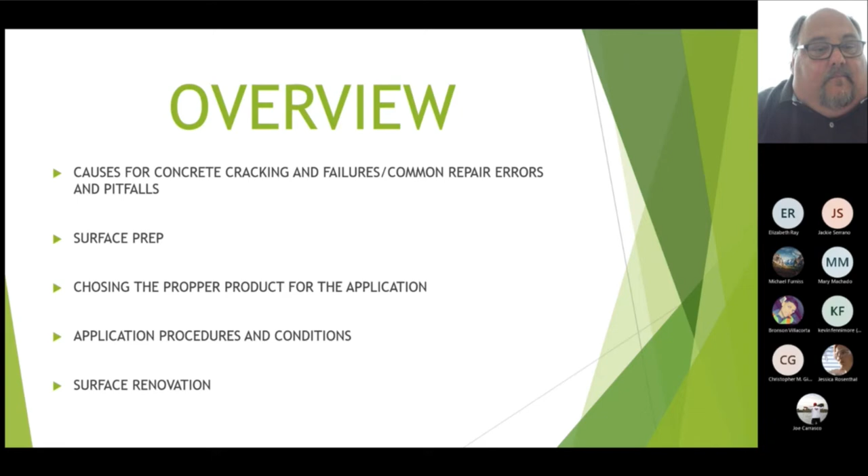And then towards the end, do a little surface renovation, because that's one of the things that we were asked about the most, was not just the crack repair, but how do I make it look decent? And especially with the way the market for housing is, it's important to make sure you've got a nice curb appeal and get most value for what you have.

So the topics we're going to talk about, like I said, surface condition and preparation. It's one of the top things that lead to a failure, not necessarily because of user error, just lack of knowledge on what you need to do and what needs to happen. And some of this stuff we think is like an infomercial for ShamWow or something, where you can just put it down over anything and it works and stops leaks and blah, blah, blah.

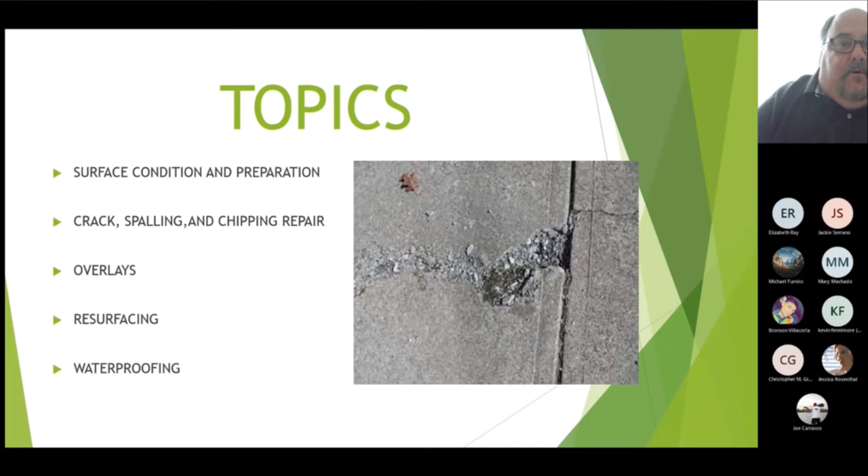We're also going to talk about cracks, spalling and chipping and repairing those, and surface prep for those, as well as overlays, resurfacing, and then towards the end, a little thing on waterproofing. So that way you have an idea of the scope from beginning to end to help you with your projects on what you need to do.

So one of the important things we will discuss is the causes for these cracks and failures. I put up a few pictures; I think we've all seen this in our travels. We might see it in our front yard and our driveway. One of the bigger causes for those cracks and failures is substrate issues. If you don't have a solid foundation, you don't have what it takes for the concrete to survive and allow for the natural occurrences that happen here, not just earthquakes in California, but settlement and movement of soil, droughts like we're in right now.

But like I said, sometimes you have a crack, water rushes down there and washes it out. No drainage underneath the slab, no drainage around the slab. Maybe not putting rock down before you put down your slab. Rebar, soft soil, even things like tree roots.

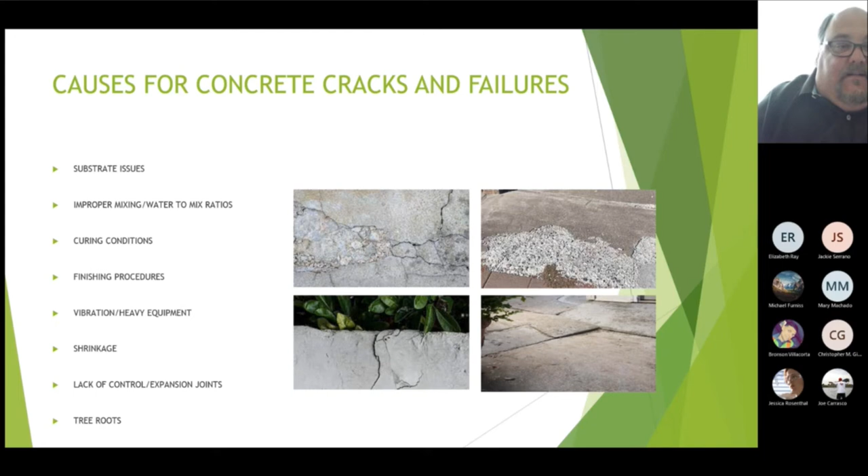The surface condition also is important too, just like we saw on the past slide. I'll go back to that. If you're looking at the top left corner, see all those little debris chunks that are getting ready to fall out? It's best to just take them out. You're patching the material anyways. That's going to cause an air bubble underneath it. It's going to cause a gap. And when weight's applied to it, it's just going to fracture through to the new patch that you put on top of it. So remove all the loose debris, everything that's not firmly attached to the slab. That's going to help you ensure that you have a good bond as well.

So that's really important, especially if you have an old slab that's really porous. Even though it doesn't look like it absorbs a lot of water, when you put the hose on it and the water disappears, it's going somewhere. You'd want to use that on patches that are either extremely porous or that are over 1 inch in depth. And the acrylic fortifier is an admix that you add to the concrete mix or to the patching product. That's like steroids for it. It amplifies the adhesion, water resistance, helps with the cure, and that's for 1 inch or less.

But you do not want to use these two together. One's a latex, one's an acrylic. When you do use them together, it will crack. So it's really important to follow the product specifications on whether or not you need it, because a lot of the new products, you don't need it. And we'll go over that once I get into the other products I'm going to talk about. We'll be able to see what products to use these on and what products not to.

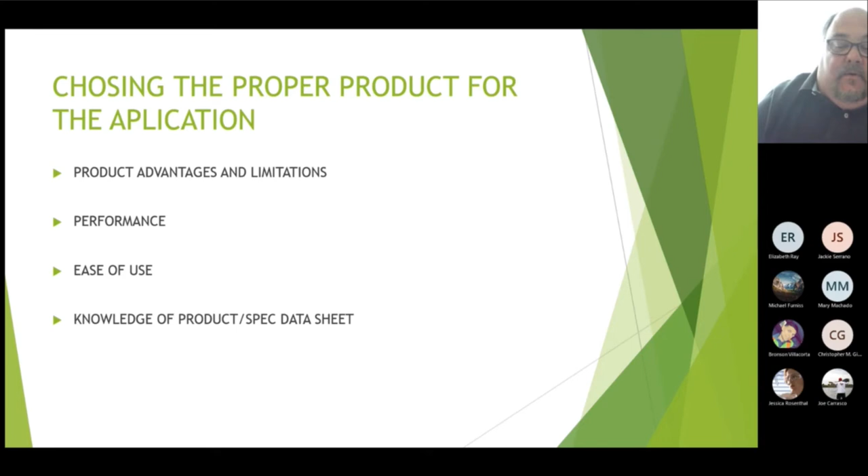Almost everything you need to know we can find on YouTube, I guess, but these product data sheets are specifically designed for Quikrete products by Quikrete people and approved by the spec data system. So they're going to give you all the information you need to make sure everything goes smooth, no hiccups, no need to call Dave when something happens.

So one of the first products we're going to talk about, it's one of the most popular products we've had in the 26 years I've been here. It's called vinyl concrete patcher. They call it vinyl concrete patcher because it has a resin in it that's similar to a vinyl. And what that does is create a great adhesion. The adhesion means this product can go down to a feather edge and usually up to about a 1/2 inch in one lift, and it doesn't lift at a feather edge. But once again, talking about product limitations and things you want to watch out for, this is not an overlay product.

You want to stick within about a 10 square foot area when using this product. You don't want to surface a whole slab with it. This is usually like if you got a tree root growing up and a little separation, you kind of need to make a little ramp out of it, or you have a pop out or a spall or a chip in the concrete.

This works perfectly because it mixes up just like peanut butter, a plastic consistency. Your surface prep for it is very simple. Just make sure there's no loose debris, make sure it's clean of dirt, paint, grease, oil, saps, things like that. Make sure it's damp, but no standing water when you apply this. Mix the material up, smooth it in, smooth it off, and walk away.

The product itself is like 5,000 PSI, but the bond strength's incredible. So being able to go down to a feather edge, you can make those little ramps and transitions, or repair thin chips and pop outs. So you won't have to worry about it chipping up and popping up as things are rolling over, even things like pallet jacks.

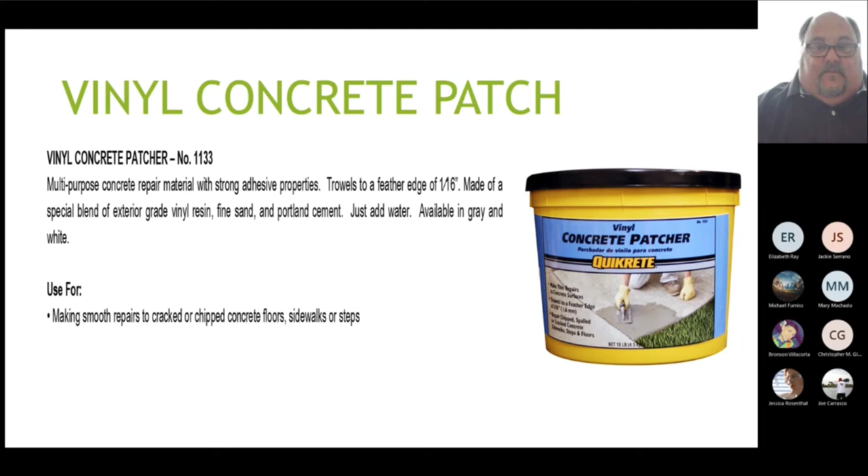So the next product we have, talking about limitations, this one has a much better ability to do more things than even the vinyl concrete patch. It's called Fast Set Repair Mortar, and it's our commercial grade line. It's a fast setting repair product that can go vertical and overhead. It usually sets in about 20 to 30 minutes. You can go 2 inches thick with this product. You can extend it with aggregate if you need to.

If you're going to repair something that's over 2 inches, definitely make sure it's rebar reinforced. If you come across a big busted out piece of a parking garage structure and there's rusted rebar, you need to make sure you clean the rust off that rebar because that will cause a crack. Forgot to mention that in the causes of the cracks too. That's another thing, corrosive rebar. When that rust happens, it creates a process that does actually cause cracks.

The nice thing about this one is, just like the vinyl concrete patch, you do not need any other bonding agent with it. No fortifier, no bonding adhesive. These have that in the mix. So that's one less step, one less thing for you to mix. The same applies with this as far as surface prep. You just make sure it's clean, damp, free of loose debris. With this one, mix up no more than you can use in about 15 minutes. Otherwise, you'd be tossing around a bunch of boulders in a bucket.

Just put the product in the space and screed it off. It doesn't matter if it's overhead or vertical like a curb, because it doesn't slump. It doesn't want to sag down. You can actually sculpt the edges of it. You're looking at like 6,000 PSI, but it's the bond strength and the actual strength of the material staying in place. If you have one material on your truck that's going to get you through a day, this is pretty much the one. I've gone feather edge with it, but it was underneath the carpeting, so I honestly can't tell you how it turned out.

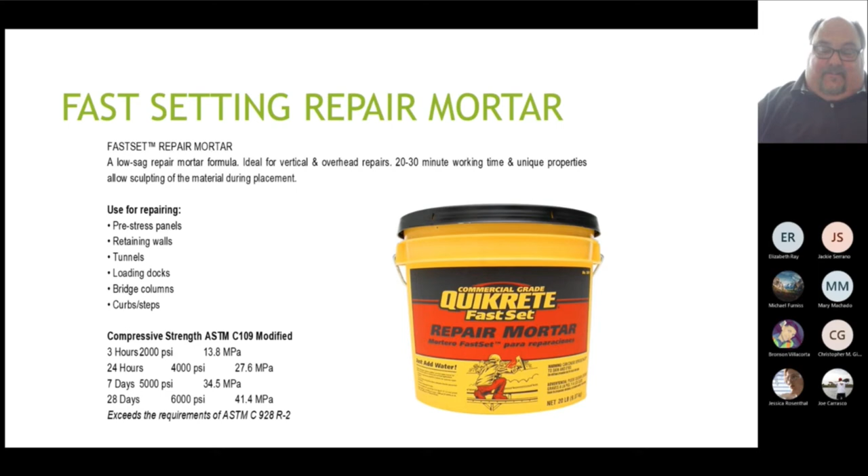We're rolling. All right, so one of the easy ways to do... Sorry. No, absolutely. I think Junior has a question. Go ahead, Junior. Oh, I didn't see it in the corner.

I apologize. Hey, Dave, can you add color to that? Yeah, you actually can. The color is going to be kind of tricky because of all the polymers that's in it for adhesion and for bonding and the different things they do in there for the products to be fast setting. The colors may turn out a little bit darker, that I've seen. And unfortunately, it's not available in a white base.

So just keep that in mind if you're using like a Davis color and you just want to splash a little black in there to do like a charcoal-y kind of color. Go light and do a test first, because usually it turns out a little bit darker. And it probably won't match exactly. That's the hardest thing, is trying to get anything to match existing concrete.

So many things affect the color of the concrete: the cure, the water content, the cement ratio, the iron in the cement, any additives, any admixes, how much it's worked, if it's sunny, if it's windy. So you can add color though to it. Sorry to drag that out. Thank you. You got it, bud.

So we're talking about ease of use. This is about as easy as it gets. When you got the cracks in your concrete, the polyurethane based crack sealant is incredible. Polyurethane base because the poly really bonds and sticks and is very, very flexible. So you won't have to worry about it busting out if you really have an active slab.

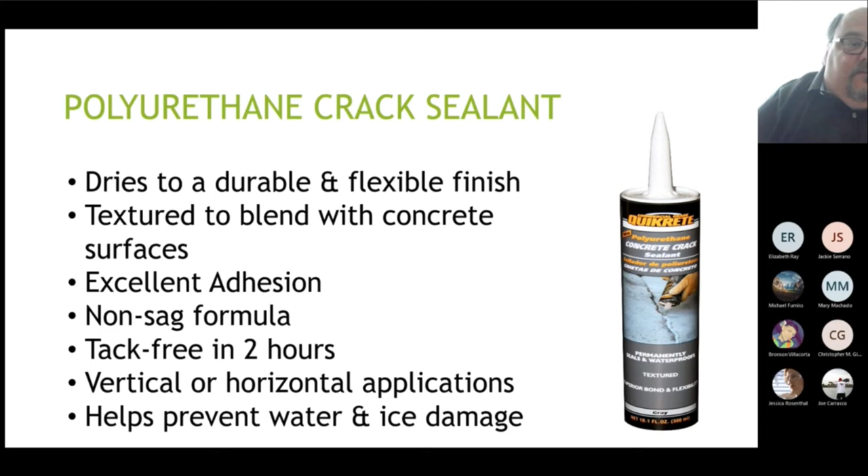Alrighty. So talking about the overlays, there's a lot of different products out there, and we make them as well, that are for overlays. And sometimes just the most simple things get the best results. This product's called sand topping mix. It's made as an overlay. It's just a sand and cement, but it's 5,000 psi on its own. You have to hand finish this just like you would any slab.

It's not a self-leveling, but the nice thing about it is it probably costs a quarter of what a normal bag of self-level costs, or some type of expensive overlay, and you're getting the same results. You go 2 inches down to about a 1/4 inch with this stuff. You can build it up thick if you need to do a thick setting bed for tile.

And then this is a product that you're going to want to use bonding adhesive or fortifier with. You're going to want to use fortifier if it's 1 inch or less, and bonding adhesive if it's 1 inch or more. Remember, the fortifier is the admix, bonding adhesive is the primer. But it's just so simple and it works fantastic.

We've had a couple jobs with this that we've done with some of the outside salespeople, and it's just so simple. It works so good. And it's one that's overlooked because everybody's looking for the super product. This one is just simple and it's fantastic and it works great. And they're going to save a lot of money.

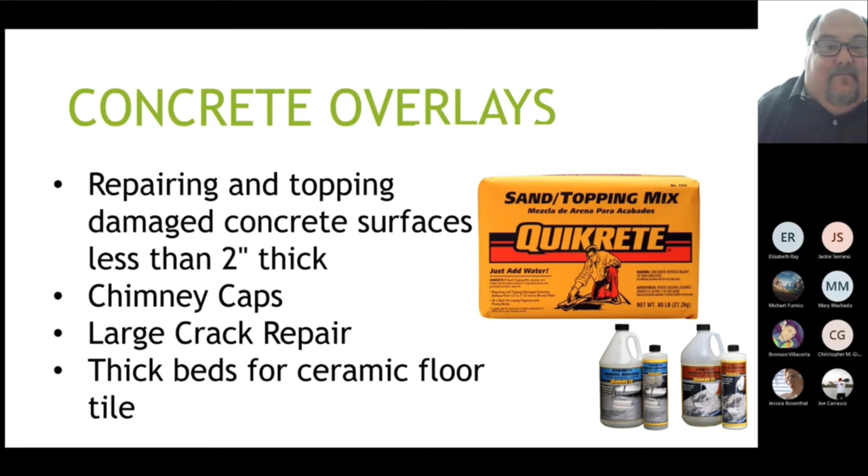So sometimes it's easier just to keep it simple. Success, simple, it's what we need to refocus on. The next product, as far as resurfacing and renovating concrete, is called Recap. What I heard most over years and years of doing this was, I patched, I used vinyl concrete patch, or I used the fast set repair mortar, and I fixed the cracks, and yeah, they're holding up great, looks good, but now my driveway looks like a spider web. Is there a way I can match or blend it in?

This product called Recap is kind of the same product as our concrete resurfacer that we used to sell in the black and blue bags a while ago. This product answers that question and then some. It's like taking your car to the body shop. They do all the Bondo work, sand it all out, and you can still see it until you paint it. Then it's invisible. That's what this is. You're talking about taking a driveway and a walkway of a house and coating it with the Recap. It looks like brand new concrete, and there's your curb appeal.

Plus, it looks nice when you come home. It looks like brand new concrete. The product, it's really easy to use, believe it or not. The prep is going to be at least like a 3,000 psi pressure washer. Make sure all the grease, all the dirt, all the paint, everything's out of there before you start using this product. If you do have to etch, make sure it's neutralized.

Now, the key with this product is you're going to have to do all your crack repair beforehand, because this will not fill. Well, it'll fill it, but you'll probably dump about 3 bags of this stuff down in the crack. You want to make sure your cracks are repaired. If there's any serious spalling, you can actually mix this stuff up and use it as a patching repair product. Mix it up into a plastic consistency.

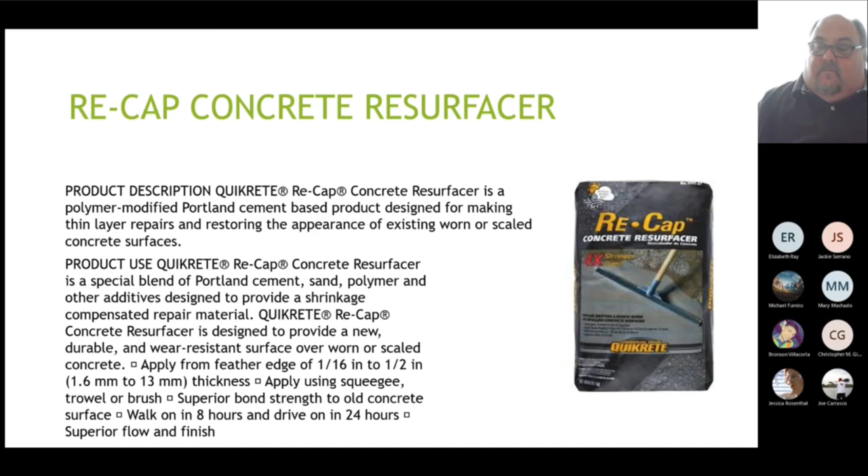So any questions on that so far? Cool. We're just blazing through this. I hope it's not too boring for you guys.

The state of California says you can't go over 4 foot high, but if you want to just dry stack your block and go over it with surface bonding cement and give it a finish, it's fantastic. And not only that, it's waterproof. So with this one, you're going to definitely want to use an acrylic fortifier and mix it in the mix with it. Make sure the block or the concrete wall is damp and clean, and go to work.

And if you have subgrade block or subgrade slab or a foundation, you can coat it with this, and it'll stop that moisture from getting into the basements and things like that. Plus, it just beautifies the yard. You can do a nice little Santa Barbara type finish on it. You can color it. It comes in gray and a white, so you can color it with the fibers in it. It's really strong. People have asked me, can you stipple it and finish it like a stucco?

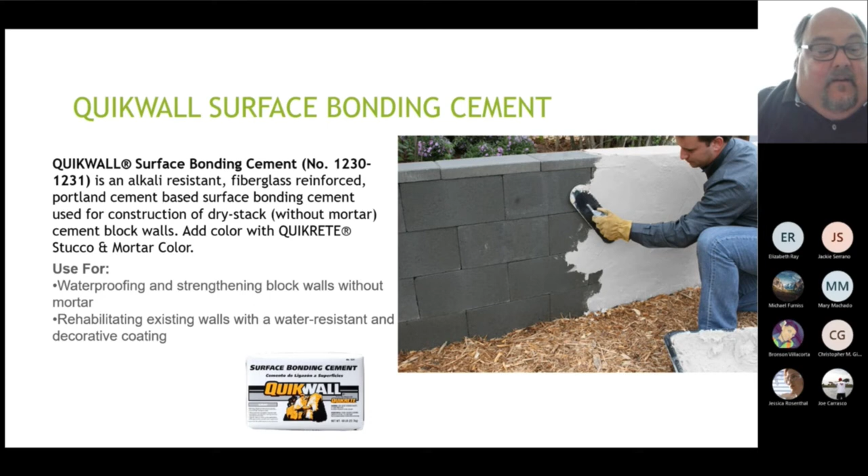Not really, because it is fibered. So you're not gonna be able to take a wet sponge and pull out the sand like you would in a finish coat of stucco. But it's fantastic, and it works really well with that. Anybody that needs to waterproof something or actually just beautify a wall, it's a really fantastic product that I think is underused in the industry. And like I said, you can go on the website and you can pull the spec data sheet right off of our website and read up a little bit more on it if you'd like.

There's also another one that's a waterproofer. It's called a heavy duty masonry coating, and some of the yards are carrying this as well. It mixes up like a cream of wheat type consistency, and it's actually applied directly to a pond to waterproof the pond. It's safe for the fish, to waterproof a basement wall to stop leakage and seepage and moisture from getting through the block. You want to definitely use acrylic fortifier with this in the mix. You mix it up and actually take a mason's brush and apply it, and it waterproofs your wall.

And it has like a natural kind of almost like a broomed finish. Obviously, you're using a mason's brush, but it has like a broomed finish to it, so it's a little rougher than like the surface bonding cement. So if you're looking for a smoother finish, go with the surface bonding cement. But if you really want a great product to waterproof, the heavy duty masonry coating is fantastic. You can use it on the ponds and it won't kill off your koi. So it's a really fantastic product to use for that.

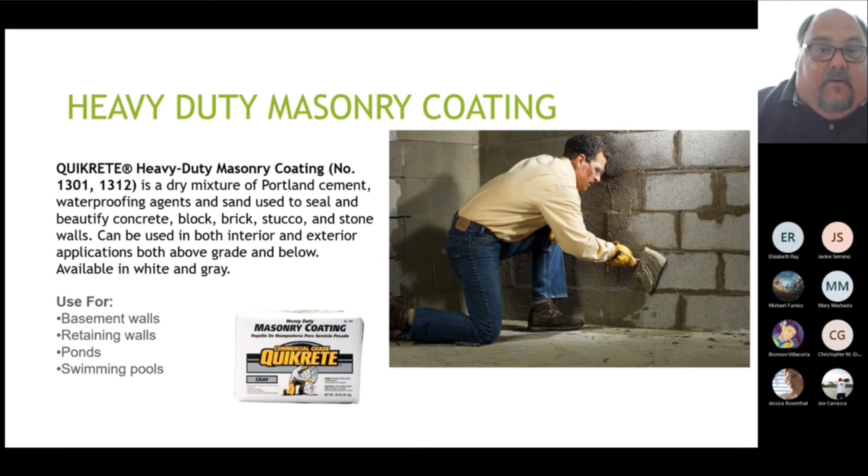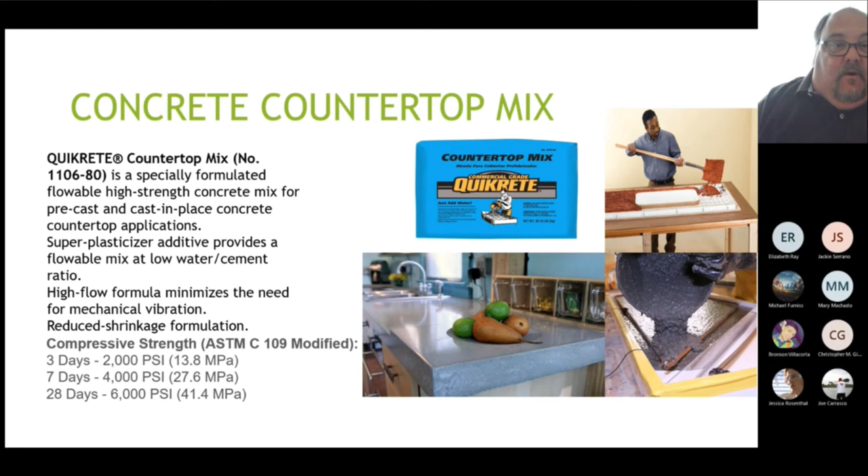It's just a great product. It's available in white. The white's called tintable base. It's not called white in the price list, but it's tintable base. That's our white, and we have a gray. Add colors to it, it's fantastic. When you add color to a gray mix, it has a tendency to turn out darker. So if you're trying to get those light pastels, that Tuscany kind of pastel buffs and things like that, go with a white base. It accepts colors a little bit easier, and it's a little bit easier on getting the tone that you want. This product is fantastic.

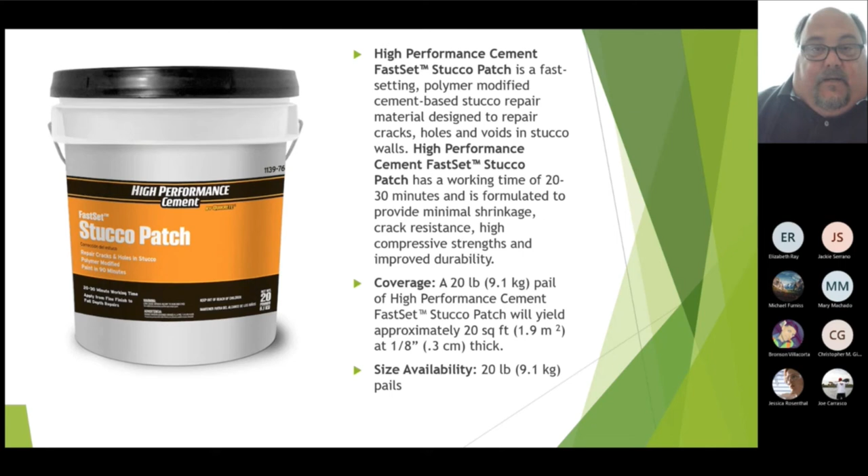And that's important, that we make it as easy as possible so they have the success and they feel confident, and they know when they come to Granite, they're gonna send them with the right stuff, and they're gonna make sure that they have the support from me and you guys as well to get it done. And this is one of the products that's a no-brainer. It's just like using mason mix versus a regular mortar mix. You make it contractor quality, but ease of use for your homeowners.